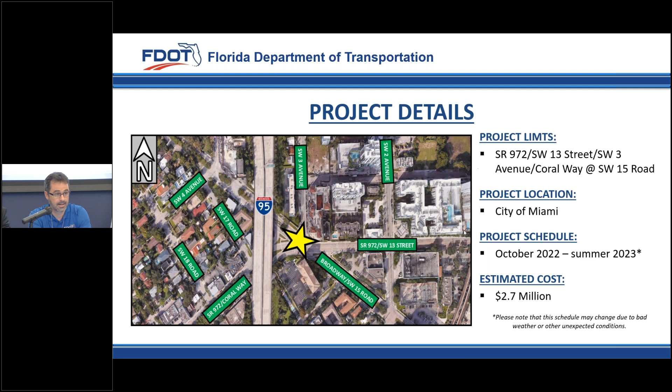Hello, good evening. Thanks for attending today's meeting to talk about this exciting project. Some project details are shown in this slide. The project limits for this contract comprehend Southwest 13th Street, 3rd Avenue, Coral Way, and 15th Road. The start date for this project will be October 17th, next Monday, and the estimated completion date will be around summer 2023. The project budget is around $2.7 million.

Currently, 13th Street, Coral Way, east of the intersection, carries around 26,500 vehicles per day, while Southwest 3rd Avenue, Coral Way, west of the intersection, carries an estimated 30,500 vehicles per day. Movements throughout the intersection result in a very skewed approach, unconventional geometry, and provide minimal opportunities for pedestrians to safely cross the road. The existing intersection alignment currently prohibits several vehicular movements.

Eastbound Southwest 3rd Avenue, Coral Way, to northbound on Southwest 3rd Avenue and Southwest 15th Road. Another is from westbound Southwest 13th Street and Coral Way to southbound on 15th Road. And the third is southbound 3rd Avenue to eastbound either 13th Street or westbound 3rd Avenue, Coral Way.

Upon completion of various traffic studies conducted between September 2013 and August 2017, it was concluded that the preferred alternative would be a roundabout with metering signals, providing traffic greater access to the immediate area and improving pedestrian mobility.

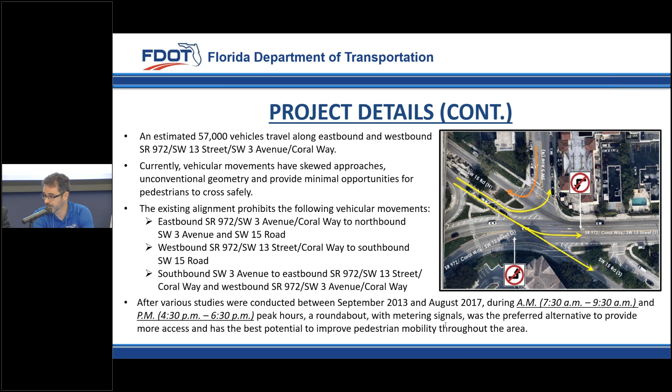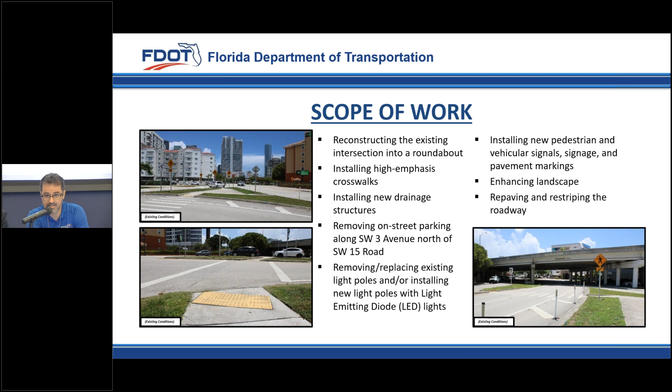So the scope of work for this contract includes reconstructing the existing intersection into a roundabout, installing high emphasis crosswalks, installing new drainage structures, removing on-street parking along 3rd Avenue north of 15th Road, replacing existing high-pressure sodium lights with LED, and installing new decorative light poles. Also, we're installing new pedestrian and vehicular signals, enhancing landscaping, and repaving and restriping the road.

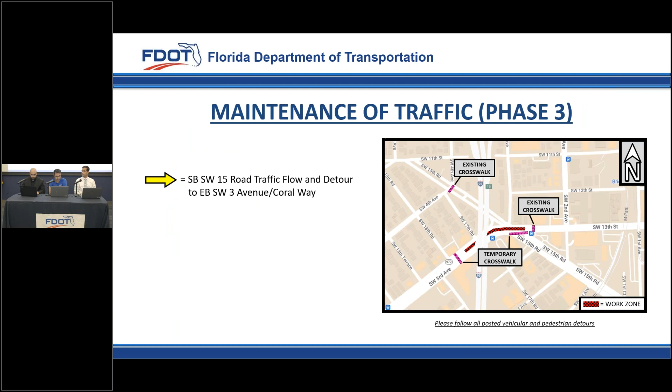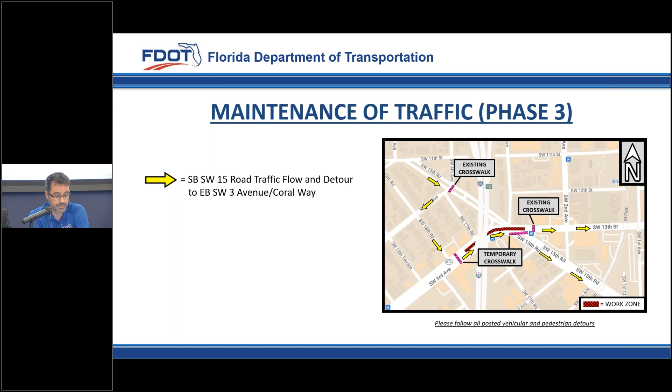During phase 3 of the maintenance of traffic, the yellow arrow shows an alternative route, very similar to what we have on phases 1 and 2.

For any vehicle traveling southeastbound on 15 Road and trying to access the south leg of 15 Road and 13th Street, vehicles will be detoured through Southwest 4th Avenue, and in this case through 18 Road, and finally Coral Way.

Truck traffic will be detoured through the State Highway System, and access to local businesses and residential property will be maintained during the whole life of the project.

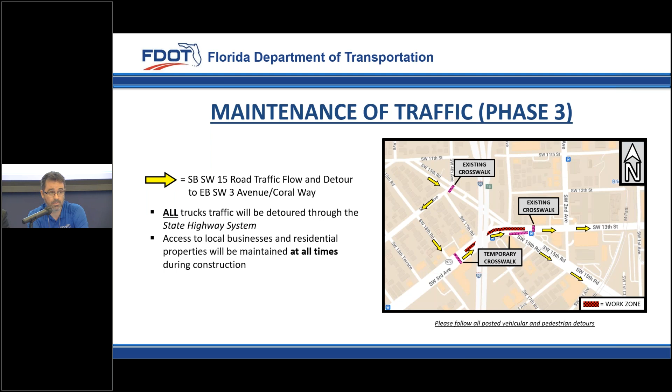This intersection is proposing metering signals on 3 of the approaches of the roundabout. We have one on the southeastbound on 15 Road, another one on the northeastbound of 3rd Avenue Coral Way, and the third one on the southbound of 3rd Avenue.

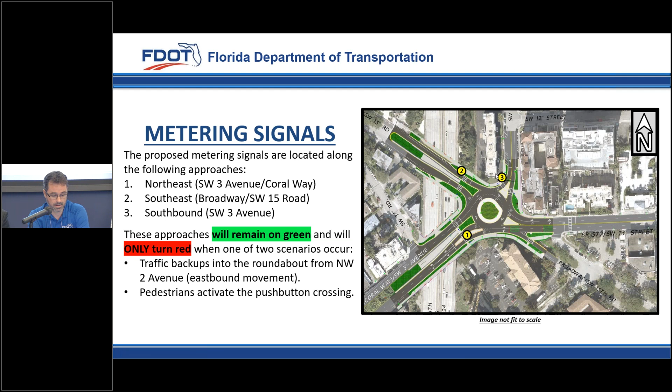It's important to note that these approaches will remain green and will only turn red in 2 particular scenarios: when traffic gets backed up from 2nd Avenue eastbound movement, and/or when any pedestrian actuates the ped post to cross the road.

Thank you, Francisco. Some of the things we are going to be expecting during construction: please make note of traffic shifts and uneven surfaces during construction phases 1, 2, and even 3, throughout the project corridor.

As far as detours, although we do have pedestrian and vehicular detours implemented, during construction we ask the public to make sure they follow all posted signage and use caution when traveling through the work zone.

As Francisco mentioned earlier, access to both residents and businesses will be maintained at all times. As far as noise, it is to be expected during all construction activities.

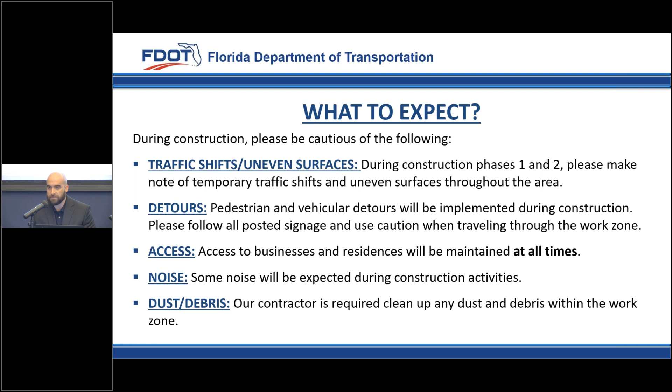Regarding dust and debris, we will ensure that our contractor cleans up any dust and debris left behind within the active work zone.

In addition to both pedestrian and vehicular detours, travel lanes and sidewalks shall be closed only during non-peak hours on non-event days. Those non-peak hours are 9 a.m. to 3:30 p.m. on weekdays and weekends, and 9 p.m. to 5:30 a.m. Sunday through Thursday nights.

Again, please note that all construction activities will occur in phases to minimize the impact to the community. Lane closure information will be posted weekly on the department's website, fdotmiamidade.com.

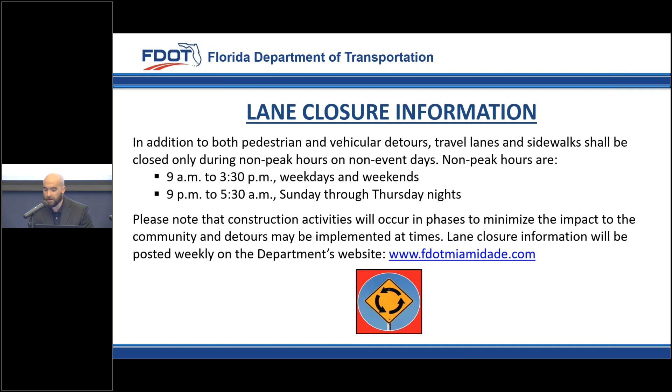And some additional information and tips on how to access roundabouts. Roundabouts have been shown to reduce injuries and fatalities by up to 80% and are designed to travel in a counterclockwise direction. Before entering the roundabout, we ask drivers to know which way they want to go first.

Once in the roundabout, drivers must yield to other traffic, pedestrians, and bicyclists coming through the area. We ask motorists not to change lanes or stop within the roundabout, and please obey all posted signs and speed limit.

Additional information regarding roundabouts can be found at fdot.gov/agencyresources/roundabout.

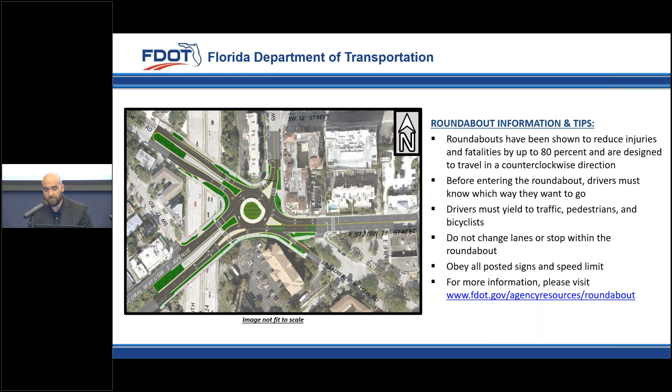As far as community outreach, our outreach consisted of door-to-door distribution to all businesses in and around the corridor, and mail house distribution. Those attending this meeting should have received a postcard indicating that this meeting was happening both in person and virtually.

We've had briefings with both elected officials and special groups to ensure that all aspects of this project were met and everybody was notified properly.

As far as electronic and digital distribution, we're going to be using Constant Contact as our mass mailer system and also general email communication.

All this information that we're presenting here today can be found on our project website, including the presentation you see behind me, all the reports, updated lane closure information, and the public can also sign up to receive email updates directly from our website.

We do encourage the public, both virtually and in person, to sign up for email updates so that the entire community and the entire public is kept up to date and in the know with what's going on regarding this project.

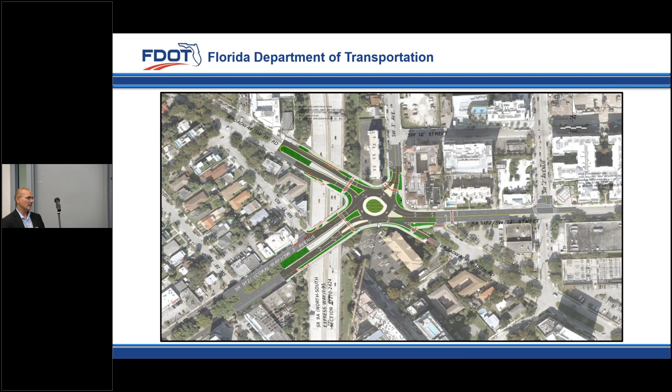Can you guarantee into the future that the sequence and timing doesn't change? At least mandate for this intersection that it's always 5 seconds or less. Miami-Dade County is always adjusting signal and pedestrian timings as volumes increase. But people might find this intersection dangerous and walk less, creating a negative feedback loop: fewer pedestrians, lower pedestrian counts, and longer cycle lengths on the sequencing, unless I'm missing something. It seems like it could have a super fast negative feedback loop.

Tej, our project engineer, wanted to mention that this is only a pedestrian actuated signal. It doesn't have timing for vehicles, it's not like a regular signal. Only when a pedestrian presses it does it provide time for the pedestrian at each leg. There are timings in our plans we can show you later, per leg, for how many seconds it provides. It's managed by the county, but dedicated only to the pedestrian, so there's no one you're competing with. Pedestrians have their own time.

No, I'm not asking how long you have to walk across, I understand it's enough time. I'm asking how long is the waiting upon actuation of the button. It's always going to be immediate. From what I'm seeing here, it says 4 seconds, if I'm reading it right, before the actuation starts. So you're looking at just a matter of seconds.

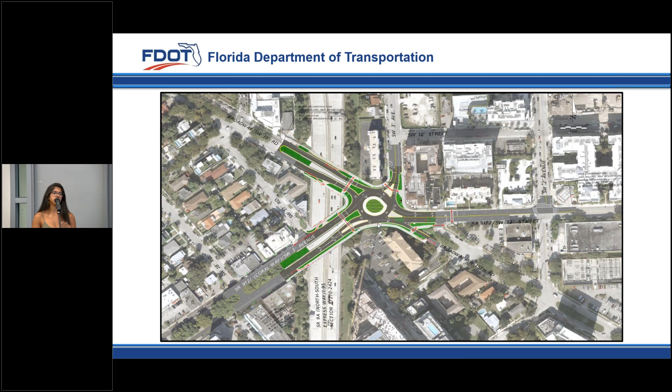Okay, I understand that perspective, and I also understand it's a little concerning that hopefully it does not turn into a 10-second wait, a 30-second wait, because that will just minimize the demand for walking and biking. So what I can say is Mike Soria and his team, as well as our teams, look at our corridors on a 2 to 3-year basis to make sure we have the appropriate timings.

This is not something that I imagine will ever actually be decreased. We are physically providing the appropriate timing, and I imagine there's going to be adequate timing. We can provide that information to you guys. Okay, thank you.

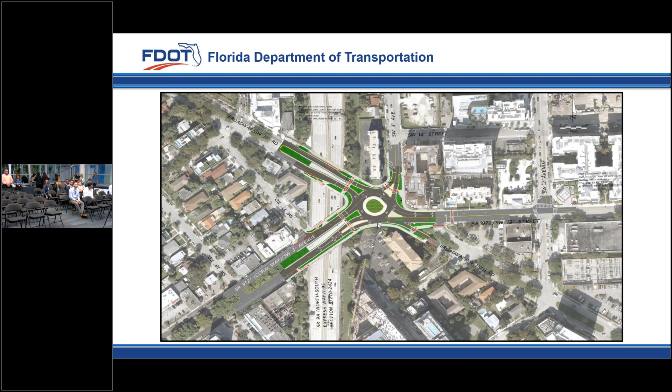The bottom line is we put money forward to budget in engineering. We've reached a common ground that we feel provides a basic level of safety, at minimal ADA compliance, which I guess means it's a best practice. But effectively, we're pointing to other best practices that can be integrated into the project, and it doesn't seem like there's consideration for integrating, folding in, or revising the design. Yes, it would require more engineering, re-engineering, and reapplication for budgets.

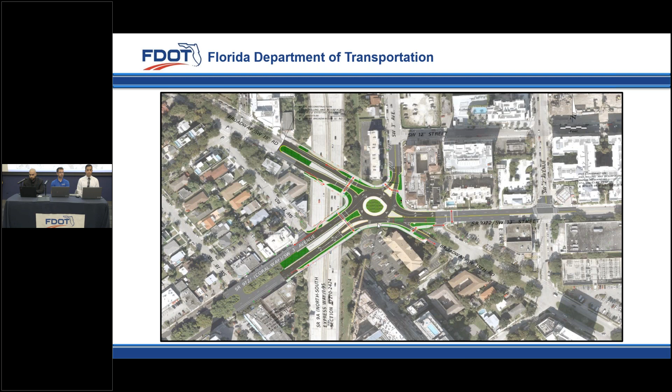But once you start surveying and breaking ground in two weeks like you have on schedule, which I know your bosses are telling you to keep, and this program has already been expedited, that means there's no coming back. So all of these voices that have voiced opinions counter to this current design are for naught. I just want to be clear that that's the case.

And I didn't get a really clear answer. You kind of stated that you would get input, but it really sounded to me like no, the design is frozen and we're moving forward with this current design. That's what I want to hear from you. Is the design frozen and are you moving forward with this design? And when I mean design, I mean comprehensive design, not a frill, a turn signal, or a left access turn in. I'm not talking about that. That's not changing the design, that's making an exception. Is there any willingness and opportunity to change this design? Yes or no?

Mr. Gomez, I'll be honest with you. You have a very, very packed question, and it's difficult for me to understand. It was only one question.

Can you change the design as shown right now? If the public's input is that we want stoplights, can you change this design right now, or has this ship sailed? We are actively looking at the comments we have received, and we will make sure we provide the appropriate engineering solution to the area that considers all different mobility needs.

Okay, so that's a no, the ship has sailed. That's clear. Okay, thank you for the input.